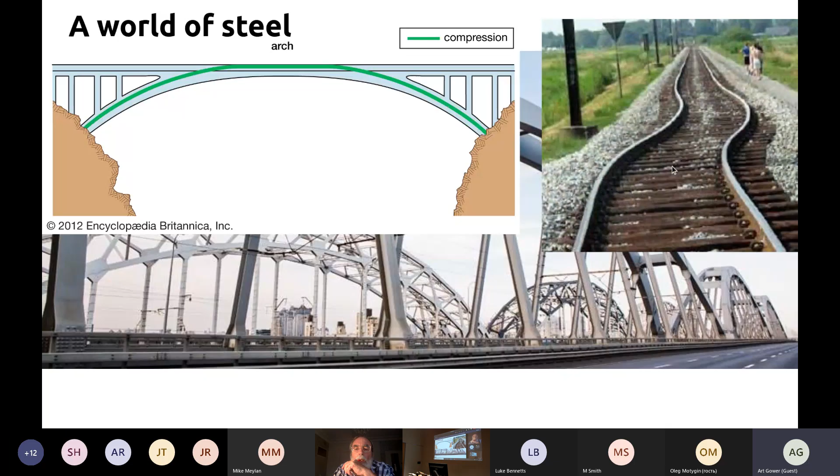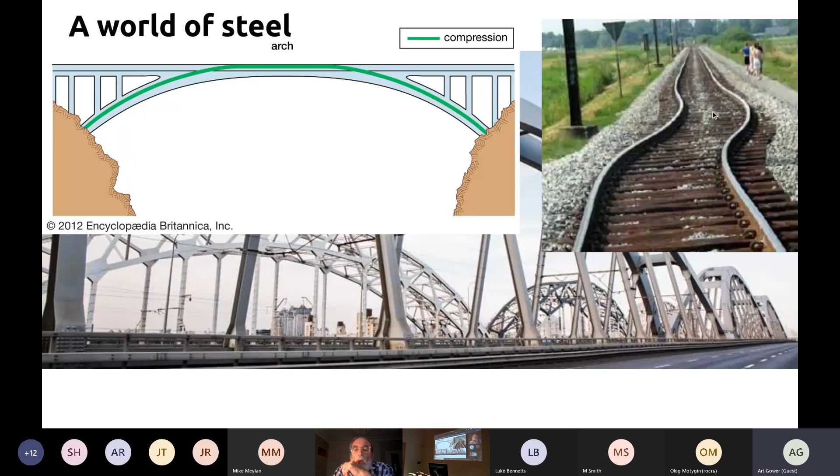Here's an example of a rail that's buckled because of compressional stress along the rail axis. It's not supposed to look like that. A stress builds up along the axis, and then if a train goes over it, or if you have an earthquake or anything, it'll just buckle, and that's really terribly damaging. Here's another example of a stress-induced fracture. So what I'm trying to convince you here, which is almost an obvious thing, is that stresses within solids are very important to monitor over time and to measure.

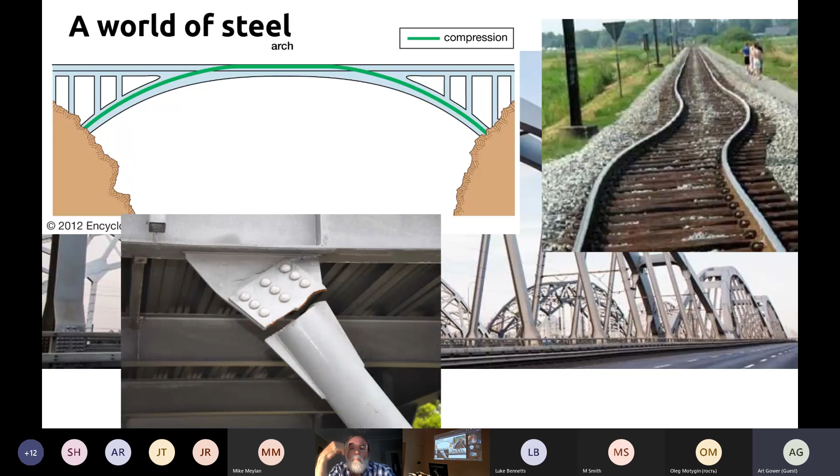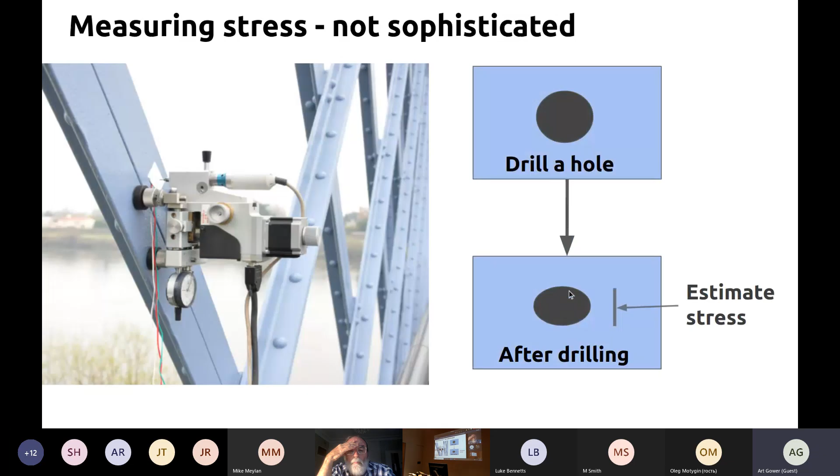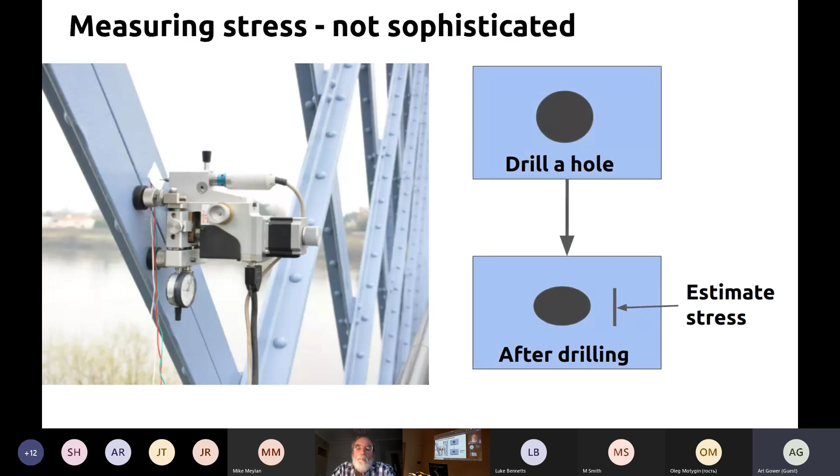The current ways that stresses are measured, sort of considered gold standard, are not that sophisticated really. Here's a little machine, it's almost like a little gremlin that punches holes in the structure. So it quickly punches a hole, waits for a while, observes how the hole will change, and estimates the stress based on how the hole changed shape. You can imagine punching holes all over your structure isn't really ideal. Not to mention that it's not easy to quickly move this thing around the whole structure, and everywhere you estimate, you're punching a hole, so you've got to choose very carefully where you want to estimate your stress.

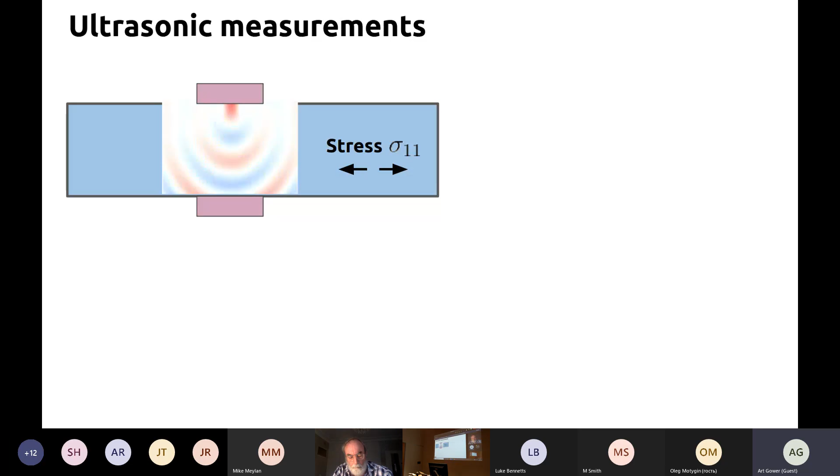So this brings me to using ultrasonic measurements, which is why I'm doing this in a WAVES conference. Ultrasonic measurements have a lot of advantages. They're non-destructive, they're quick to measure, they have a lot of information. When you measure them and they come through to the other side, you can change the frequency, you've got the speed of the wave, you've got the amplitude, there's a lot of information there. Disadvantage is that you need quite sensitive equipment to pick up the signals, and for engineers, interpreting such signals is far more complicated.

There's a well-known example of a type of ultrasonic measurement that can give you the stress. It's called birefringence, and there's an equivalence in optics and other wave areas. Basically, if you have two different polarized shear waves—can you see my mouse? I'm going to guess you can. If you polarize one of the shear waves in the x1, x2 plane, and you polarize the other shear wave in the x3, x2 plane, and you send them across this, say, bar of steel I've got here that's under an in-plane stress, the difference of their speed squared will give you access to the stress. The only issue is that there's this constant K that depends on the material.

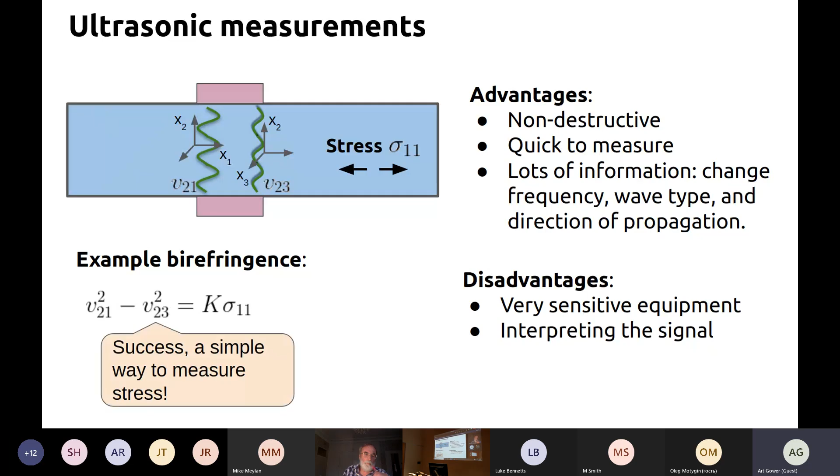So when this was first brought over to ultrasonic measurements, maybe 60 or more years ago, it was considered that this would be the way forward to measure stress. But that has not happened. It has not turned into a device that's been used by industry. The success has never come. And one of the reasons is that this constant K varies quite a lot. Even if you take a piece of steel in the lab and measure it, even if it's the same type of steel, the constant K can change as much as by 50%. So the issue is, how do you measure K, capital K? And it's actually very difficult to measure capital K with a simple ultrasonic setup.

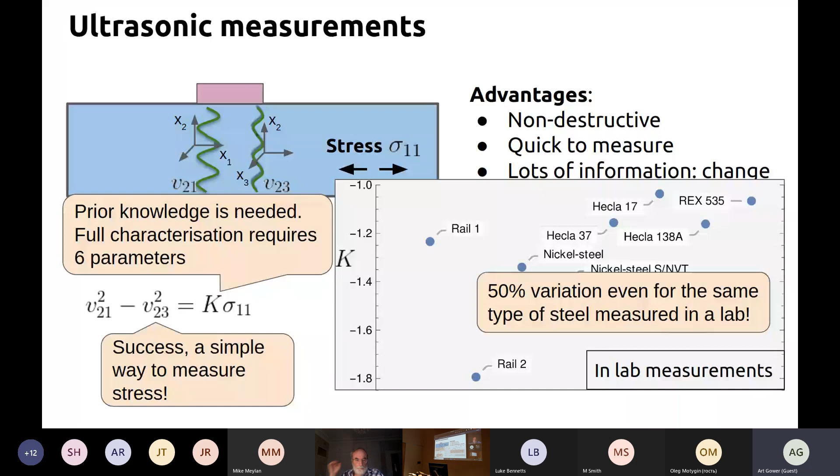So the issue with this way of measuring stress, and in fact all the ways of measuring stress such as ultrasonic measurements, is that you need prior knowledge of the material constants, which might require up to 6 constants for weakly nonlinear solids. If you're aware of weakly third-order elastic materials, you have these extra 3 elastic constants that are quite difficult to measure and know, and they are the extra constants which couple any waves to stress.

So my idea was to look for ways of measuring stress that didn't require these constants.

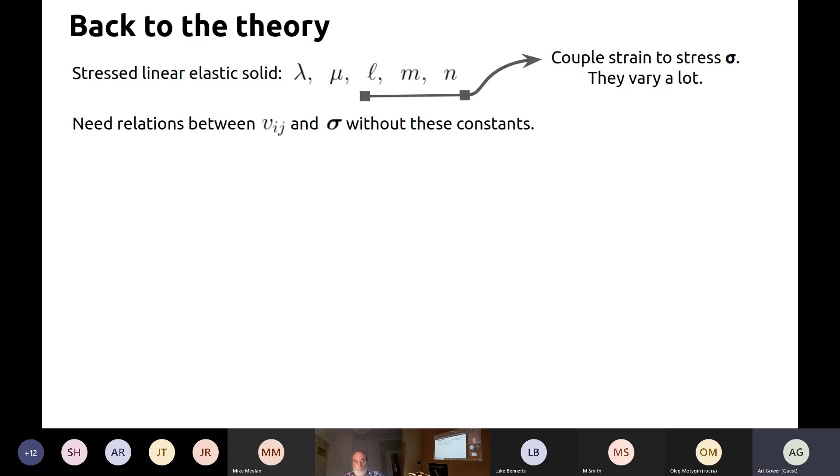Because there's been about 40 years of effort in trying to measure these constants accurately and use these well-known identities, my idea was, well, people have tried that, let's try something different. Let's try to devise a measurement that you don't need the constants for.

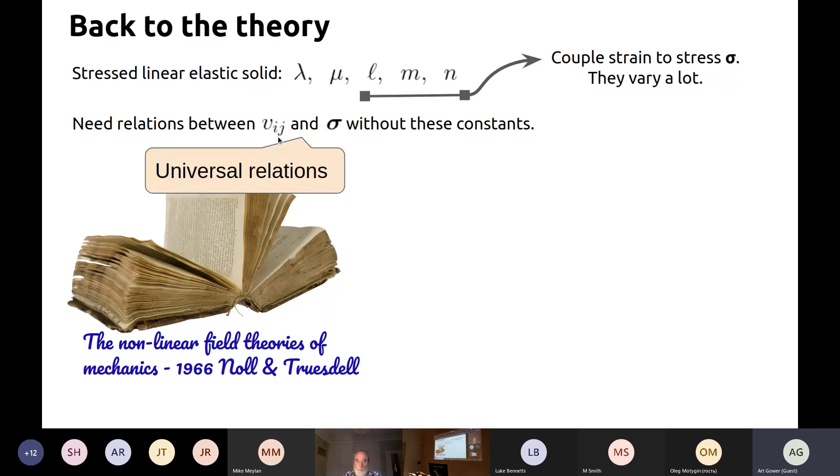So as any good solid mechanician does, you go back to the nonlinear field theories of mechanics by Noll and Truesdell, which is a really tough read, but there's a lot of information in there. The term I'm looking for is universal relations, between the velocities of the wave and the stress tensor.

So a little bit about nonlinear solids and coupling waves. The way we usually model this is that we consider there's some configuration with some stress, sigma, and when you superimpose a small elastic wave or an ultrasonic wave, you take it to a new configuration that has a new stress. You've added a little bit of stress, delta sigma, because of the wave itself. Some people call them stress waves.

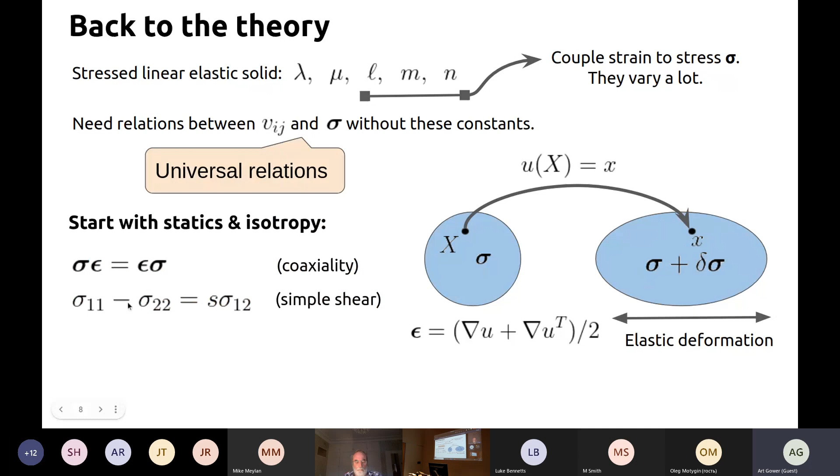So the simplest case to consider is statics, no waves at all. Are there any well-known universal relationships between the strain and the stress? There are things like, for isotropy, you have coaxiality - you can change the order of the stress and strain tensor. And there's a nice one about simple shear, which I'll illustrate in a bit more detail, just to show how interesting these universal relationships can be.

So here we've got, if you're familiar with stress tensors, sigma 1,2 is the shearing stress on the top face here and also on the bottom face. And sigma 1,1 and sigma 2,2 are stresses considered - if you had a flat face, it's how much is being pulled this way, sigma 1,1, and sigma 2,2 is how much the top face is being pulled up.

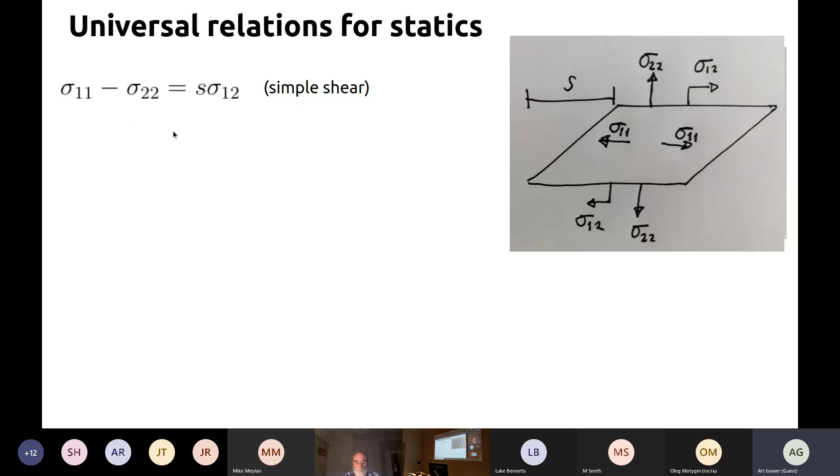So the universal relationship says that the total amount of shearing, this displacement S, is always equal to this relationship with the stress. So you could think about designing a way of measuring stress by shearing solids. Of course, that doesn't work - that works great for soft solids, not so good for a piece of steel, but still an interesting relation.

So can we ask the question, does there exist other universal relationships for statics? Usually in most of the literature you describe how a small added bit of stress relates to the elastic strain you've created through some fourfold tensor that then depends on the stress itself. This turns out to be quite difficult to design, to spot universal relationships and to design new measurements, because this is a very horrific fourfold tensor.

A nicer way to write this is in matrix form, and by using a bit of tensor algebra, we can reduce it to something like this. So you've got that the small added stress from the wave is something that's related to the strain plus the stress of the reference. These alphas are, in a sense, material constants, but they're actually functions of sigma.

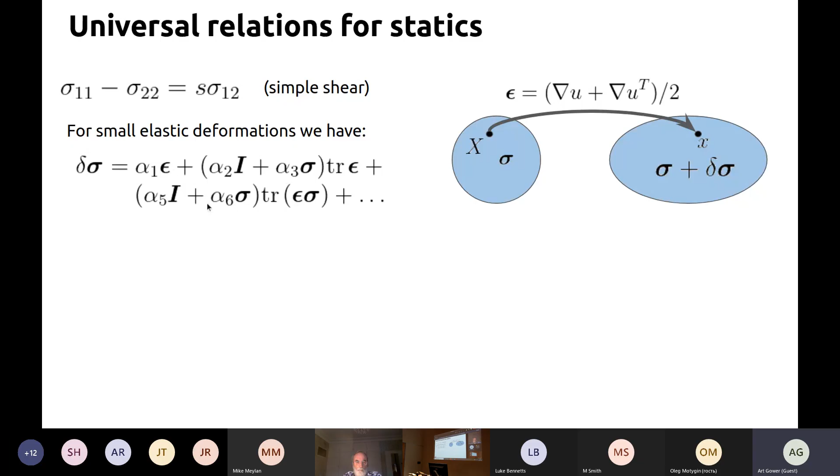Going back to statics, I won't go over the details, but if you simply write out what is the incremental stress, and you ask yourself what kind of identities you could get by having different combinations of the strain contracted with this stress equal to 0 - you're looking for identities which depend only on the stress and the strain - you can prove that there exists only 3, for linearized strain, for statics.

So if you can do it for statics, maybe we can do it for dynamics, for waves. The extra difficulty here, of course, is that in dynamics, rather than satisfying just the divergence of the stress equals 0, you've got this double dot in time... well, it's actually not strain, is it? It should be U here - small mistake, oops - U being the displacement, which is shown up here.

Yeah, so not the strain, it's U.

Right, so let's turn to dynamics and think about finding universal relations for dynamics. So you've got conservation of momentum to satisfy. Let's keep things simple and consider only bulk waves, because there isn't any proof to show all universal identities, relations in dynamics. So rather than trying to prove everything, let's think of bulk waves.

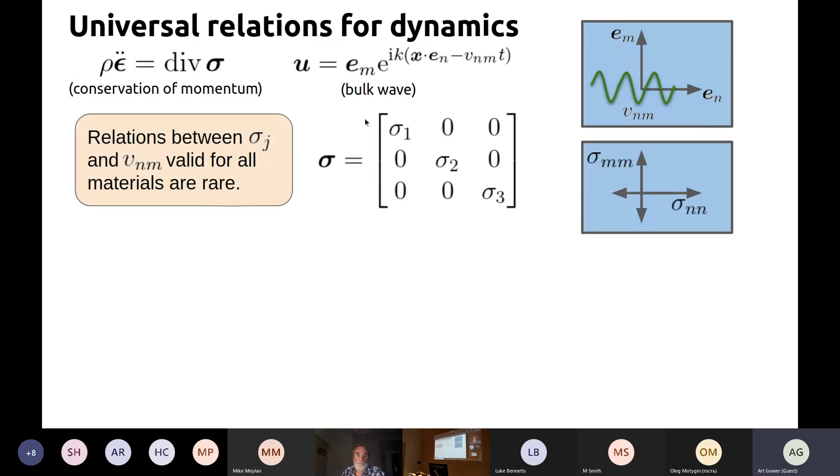So why only the speed and not the amplitude? This might not be immediately obvious, because a wave has both amplitude and speed. But in ultrasonics, it's far easier to measure the speed of a wave than it is to accurately measure its amplitude. That's something from practical experience. Measuring the amplitude requires a lot more sophisticated equipment.

So there isn't any well-known universal identity except one notable exception: if you take two shear waves polarized in the same plane, but one traveling along En and the other along Em, their difference squared gives you access to the stress directly. No material constants needed—it's okay to have the density because that's easy to estimate. This also leads to a strange identity here, which I'm not sure what the use of is.

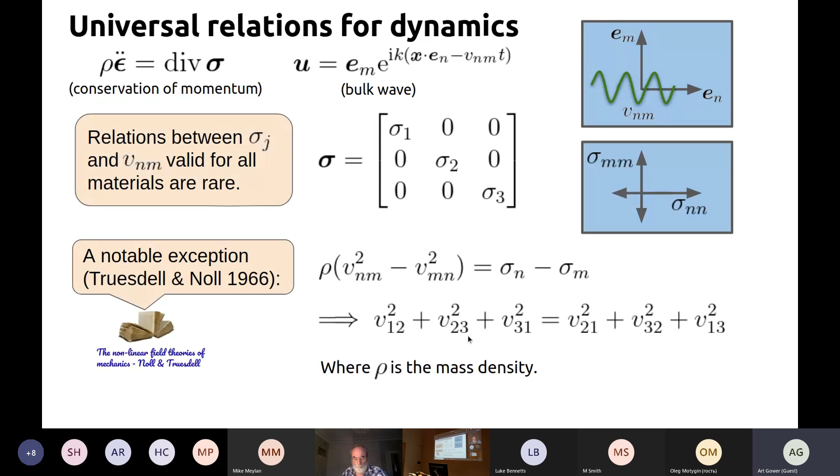So great, we've got a universal relationship, the golden goose from 1966. It was hidden away in the nonlinear field theories of Noll and Truesdell. So all you had to do was open it up and read.

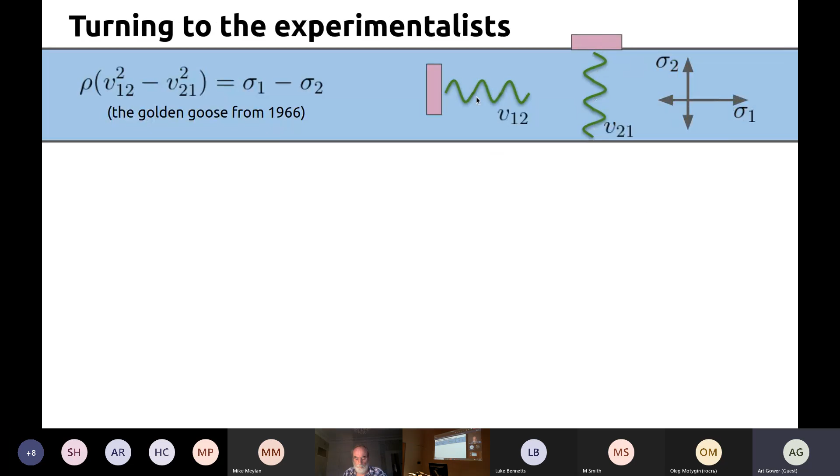You send one wave across the sample of steel, like so, polarized in the same plane, and then you've just got to send another wave that's inside the material along the steel somehow. I'm not sure how that's going to work, and that's when you realize it's impossible to send such waves easily. How can you generate a bulk wave inside this bar, traveling along the bar itself? Obviously you can create waveguide modes and all sorts, but they're not the same as the bulk wave mode. So I asked my experimentalists if they could do that, and they were very disappointed in me.

So I changed direction, and instead of looking for universal relationships that don't exist in a simple way to create a measurement, what about non-universal relationships? That means, how about specializing to a class of materials that we're interested in?

So hard solids like steel are weakly nonlinear. They're basically third-order elastic solids that depend on those extra three constants. So wherever you see the stress multiplied with the stress itself, you can just cut that out. It's an asymptotic expansion for weak stress, or an asymptotic expansion if you think about hyperelasticity for third-order strain.

So okay, we're looking for non-universal relationships, specializing the material. Now what other kind of measurements could we possibly take? It's easy enough to build a wedge to send a shear wave or a pressure wave at an angle. So I'm going to consider only shear waves here. I'll call the velocity of this shear wave, polarized in this plane, traveling at angle θ1, v θ1.

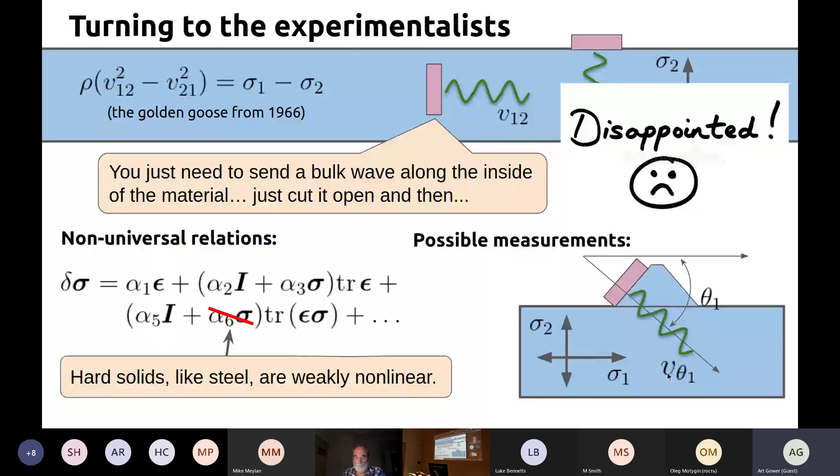So you specialize all you can, you list all the types of measurements you can do. Remember v θ1. Now we're going to ask ourselves: when is the difference squared of these two shear waves independent of the material constants? Why is this even a good question to ask? The reason it's a good question is because we know it's universally true that when the angles of the shear waves differ by 90 degrees—i.e., their direction of travel is 90 degrees different—then there's a universal relationship that says their difference squared gives you the stress.

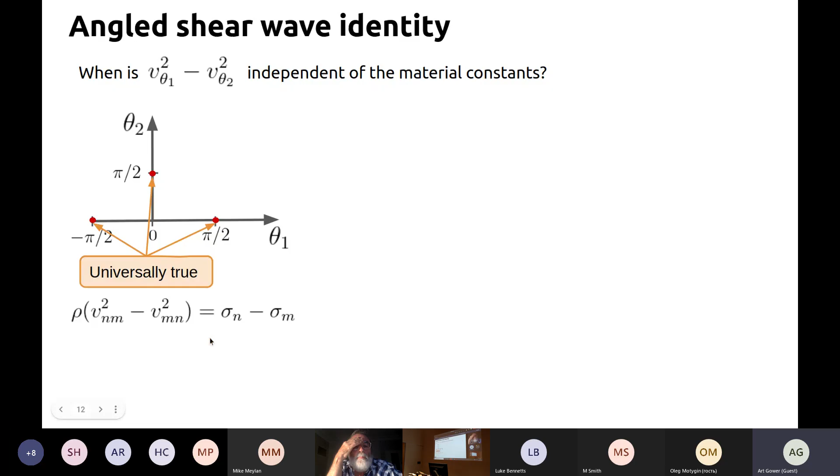That's from the book of Noll and Truesdell, a well-known identity. So it's reasonable to assume that if we weaken the assumption of asking that this be true in general, and ask that it's only true for third-order elastic materials, perhaps we can expand these dots.

And that is exactly what I was able to do. Turns out the dots turn into full lines when you specialize to weakly nonlinear solids. So if you take any two points on these lines and take their velocities, the difference squared will give you the stress. There's a small adjustment here. So this is how I discovered this, what I've called the shear wave stress identity. The difference between two wave speeds squared when their angles are plus or minus 90 degrees can give you access to the stress.

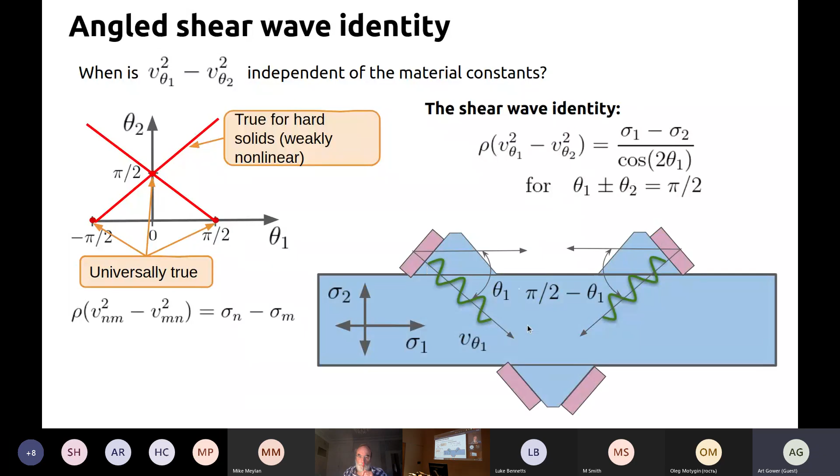But you've got to divide by the cosines, you've got to know the angle you've centered. So this is what it would look like roughly. You build two wedges, send two shear waves polarized like so across it. You measure it on the other side, and voila, you've got access to the stress.

So I was very excited. I went back to the experimentalists, ran across the corridors, and that's when COVID hit. Well, actually we were in COVID already a long time by then, and there was no entry, social distancing. So we turned to finite element simulations to check that we would be able to measure these, and whether they're sensitive enough to the measurements.

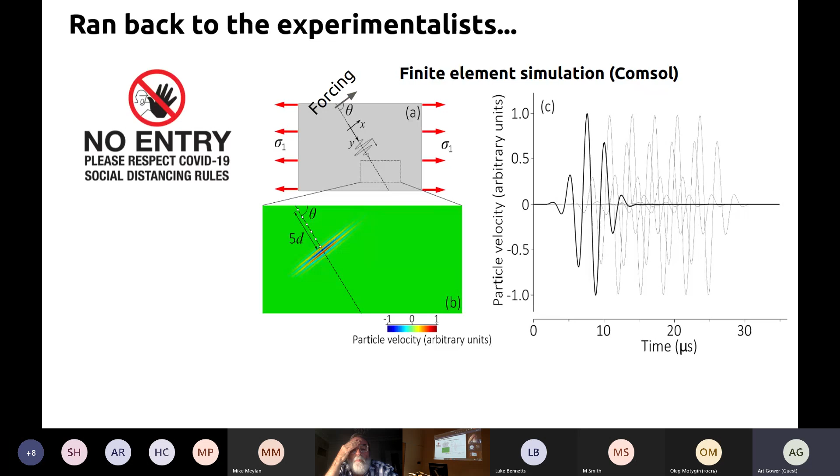Obviously, we know it's true because the math says it's true. You can just do a synthetic analysis, but it's good, especially for engineers, to do finite element simulations to convince how sensitive these measurements could be. And so we did these in COMSOL. Guiyang Li is an expert at these.

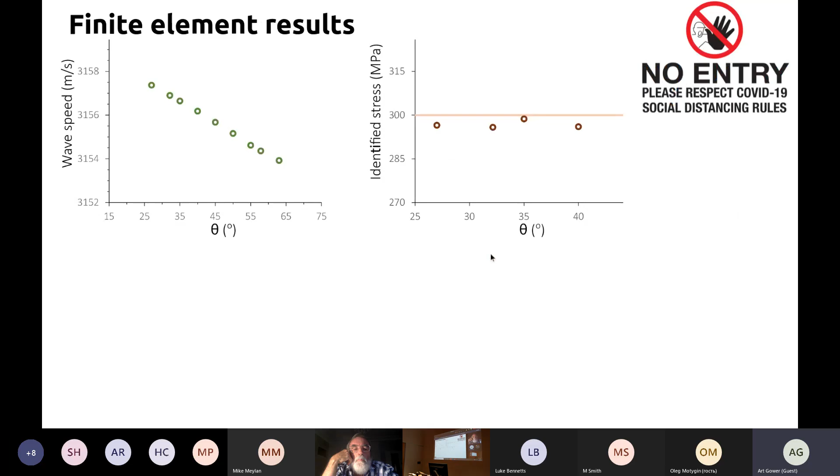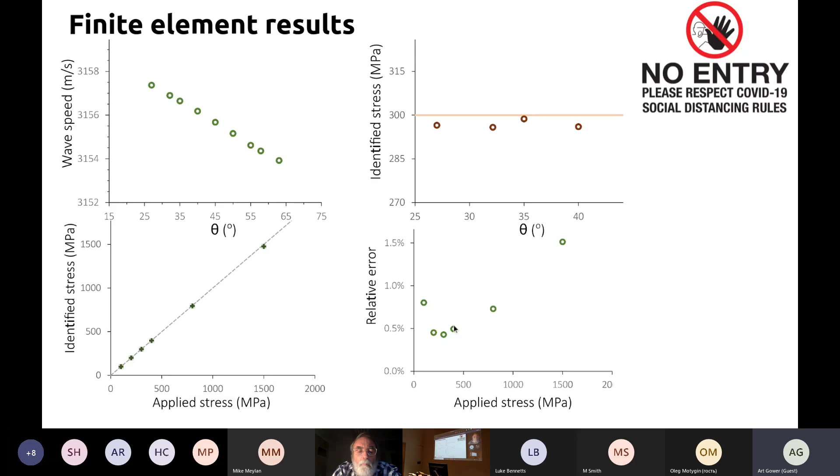So I went to submit this into journals of non-destructive testing. They were very supportive. The Structural Health Monitoring Journal said the authors should conduct some real experiments and didn't send it out to review. The chief editor of NDE and E International said any submitted manuscript must contain extensive experimental work to support theory, said please don't resubmit. Although I would like to say that both journals clearly said that they do publish papers that use numerics and theory only, but the current chief editors do not agree.

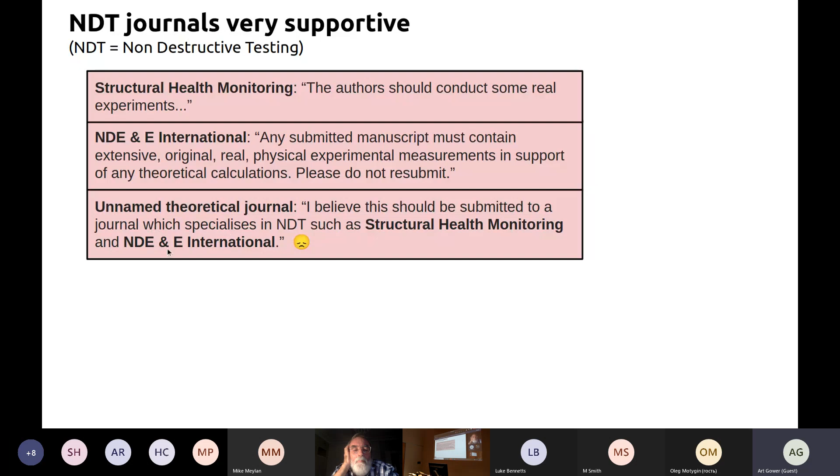Then an unnamed theoretical journal also didn't send it out to review, saying they think this should be submitted to a journal that specializes in non-destructive testing, such as the Structural Health Monitoring Journal and NDE and E International. So that sort of led me into a loop. Eventually we submitted it to JASA, the Journal of the Acoustical Society of America, and it was sent to review with very positive reviews. I just thought that was a nice story to tell.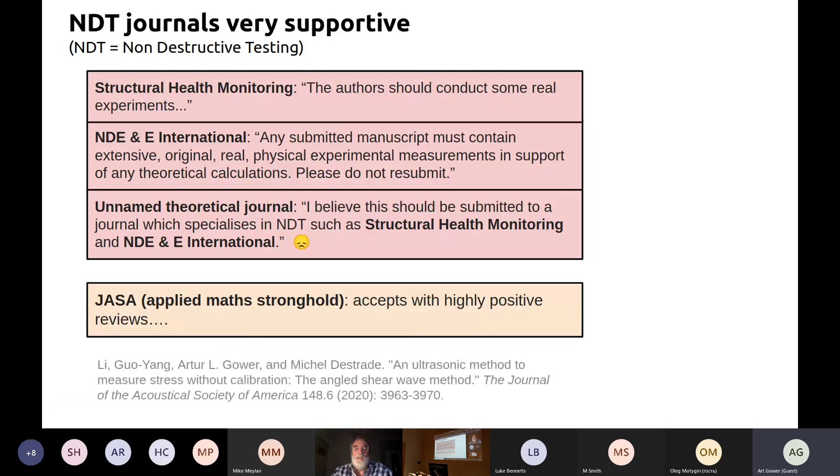And there it is. Since then, we've now got a range of experiments on the go, trying to both check this experimental sensitivity and deploy this to rail. And yikes, doing experiments is complicated. I'm glad I'm not the one who has to do all the details. But in Sheffield, they're experts in ultrasonics and steel. So if you have any use case for using ultrasonics and steel, please feel free to contact me.

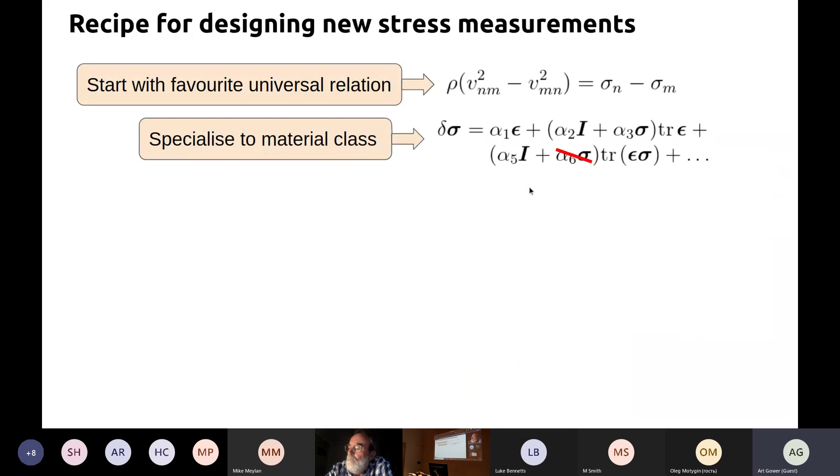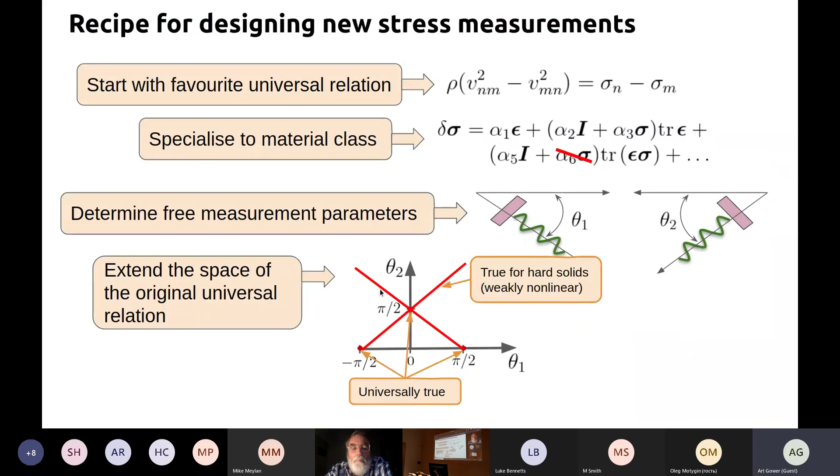So summarizing the story: start with your favorite universal relation, you want to find new measurements, it doesn't need to be just of stress. You can find an idealized identity that relates the two things you want. In this case, I want stress and sound speed. You can specialize to your class of material if you're working in solid mechanics. In my case, it was weakly nonlinear solids, or third order solids. You can parameterize all your measurements, and you put it all together in a mixing pot. You can discover your own new universal identities for measurements, and that is the recipe.

So thank you for listening. It's light on the maths, but I'm happy to answer any questions about the maths, if there are any questions.

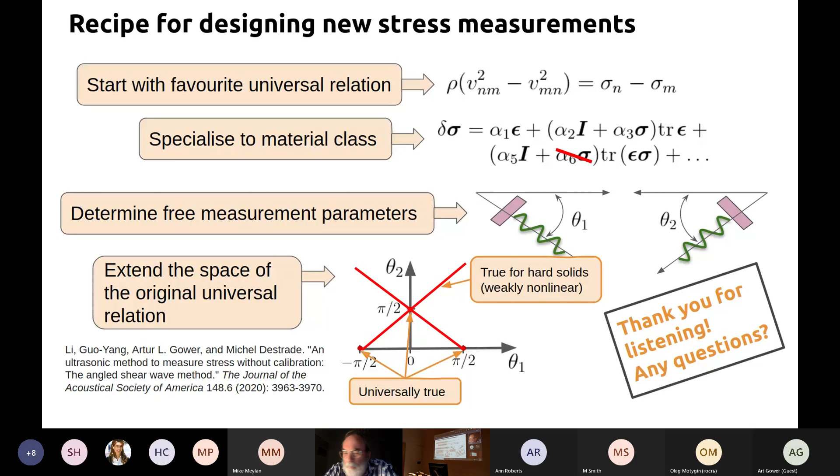Okay, thank you, Art. Are there any questions? If not, I'll just make one comment.